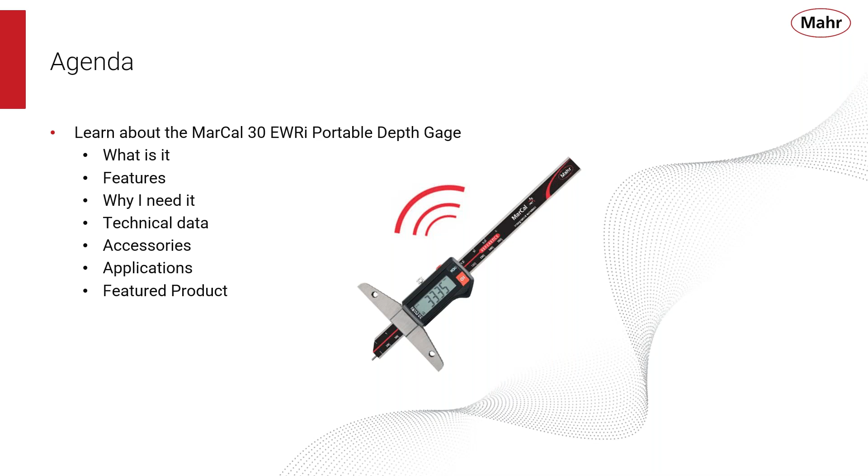Mahr has a wide variety and a full portfolio of digital and wireless hand tools, whether it be digital calipers, depth gauges, digital indicators, or digital micrometers. They're all feature-packed and modern, all high quality, and meant to be used out on the shop floor.

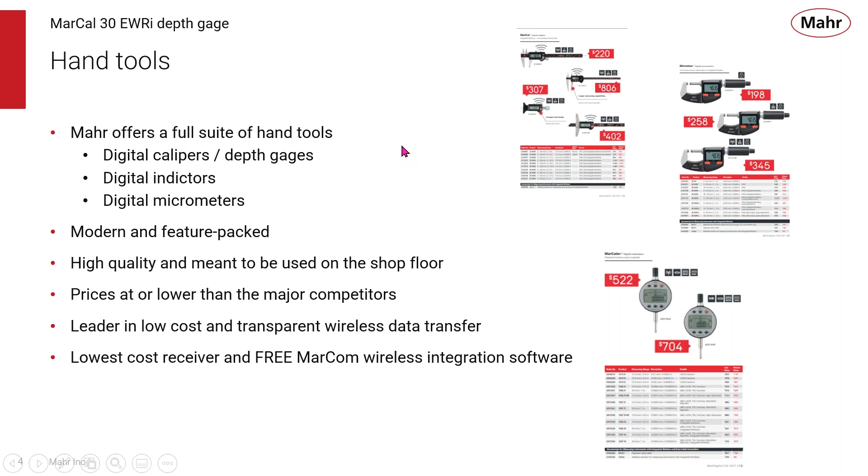And they are at prices lower than many of our competitors. We're the leader, I think, in low cost and transparent data collection. Plus, we have the lowest cost receiver, and free MarCom wireless integrated software, which all make our wireless products, I think, some of the best value out there.

This complete line of hand tools includes 185 innovative products, and 68 of them are integrated wireless, whether it be digital calipers, digital depth gauges, digital indicators, or digital micrometers. You can see we have a wide variety of not only standard product, but also specialty calipers and specialty micrometers for those unique measuring applications.

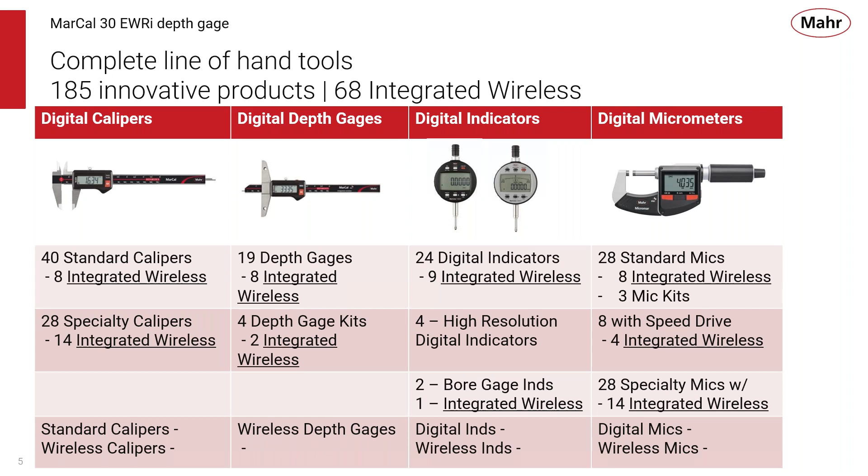Now here's our full line of MarCal depth gauges. You can see I have a broad product here of handheld gauges for lots of different applications. Starting with our featured product, the 30 EWRi, and its wired brother, which has the integrated wireless as part of it. It comes in a 6, 12, or 20-inch version.

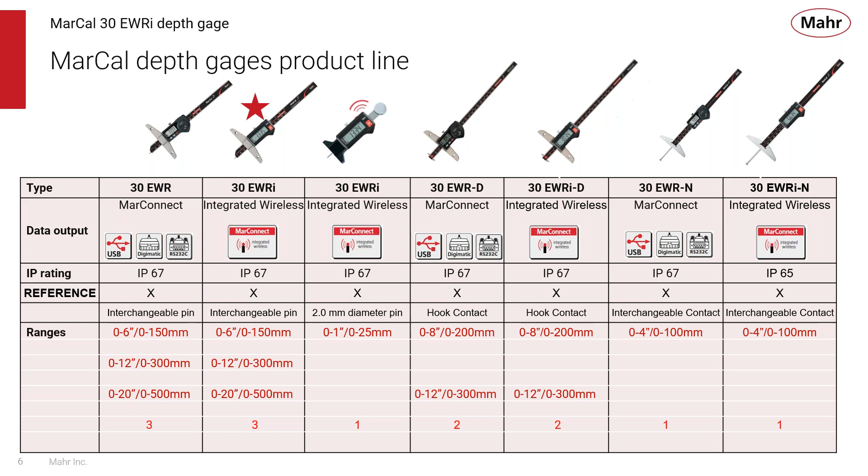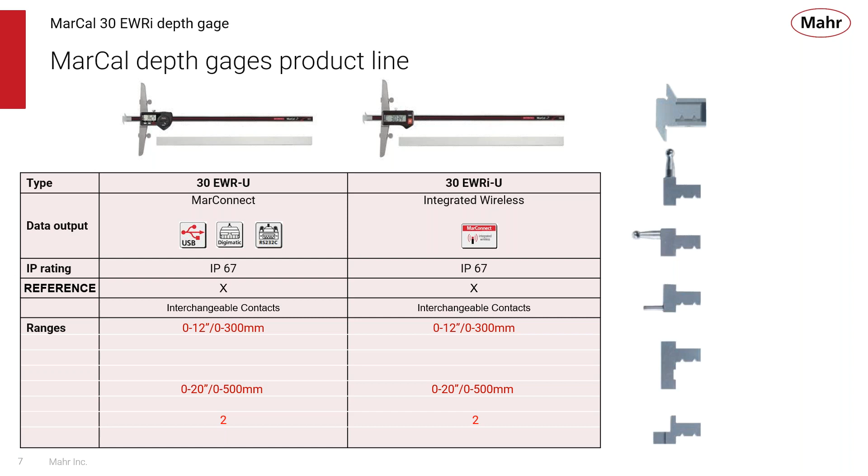We have a mini 30 EWRi that's pocket size and portable, plus other versions of depth gauges with different types of contacts or hooks on them that allow you to get and measure grooves and so forth within your part. Plus, we have a depth gauge with interchangeable contacts that allows for ball contacts, hook contacts, or edge contacts in a wired or wireless version, all the way up to 20 inches in depth, making these great universal depth gauges for virtually any depth application you may have.

Now, the MarCal 30 EWRi has lots of depth applications. They come with different contacts available. Most of them are purely for depth gauges, like the 30 EWR with its pointed contact. You can get a small or large bridge on it.

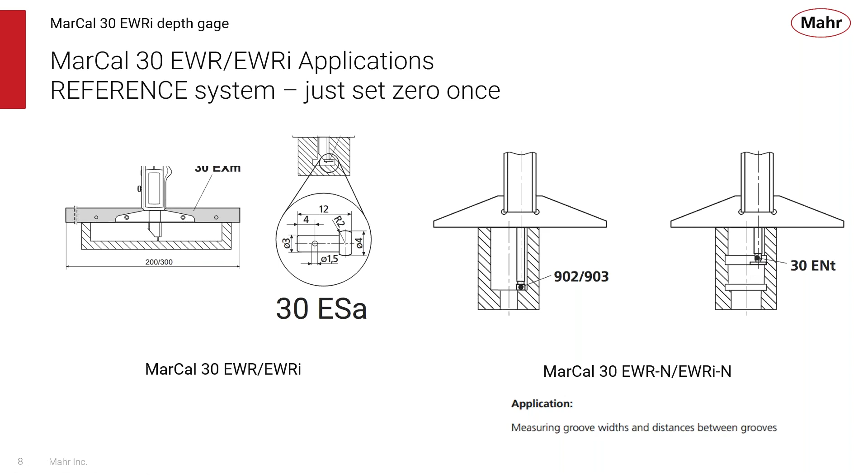But there are other applications where we can interchange contact points, allowing us to get into various above or below grooves within the part we're measuring. Some of our depth gauges have hooks on them, so if you need to get an inside shoulder on a depth or an upper shoulder, or the length of that groove, these types of depth gauges are ideal for those applications.

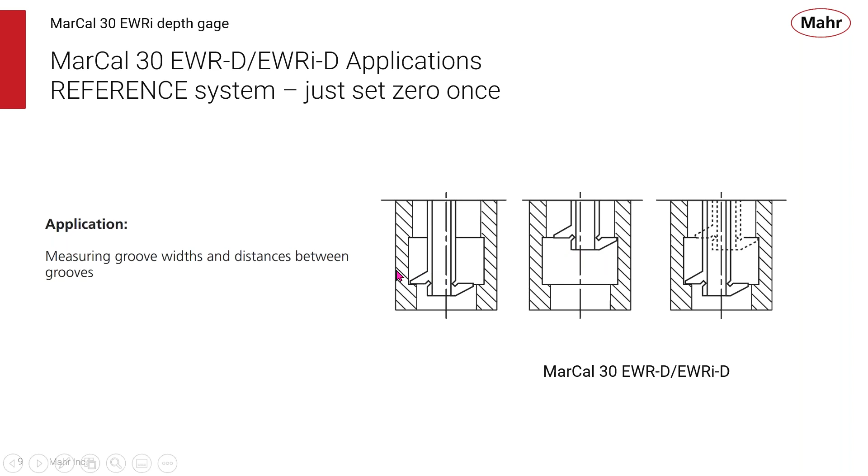With our depth gauge with interchangeable contacts, we have the hooks, extended ball contacts, we can get into a small drilled hole within a depth, close to an edge if needed, and these contacts are all interchangeable and can be used for lots of different depth applications. There's even a large measuring bridge up to 300 millimeters that allows you to span large diameters or large grooves and still use the depth gauge with great accuracy and performance.

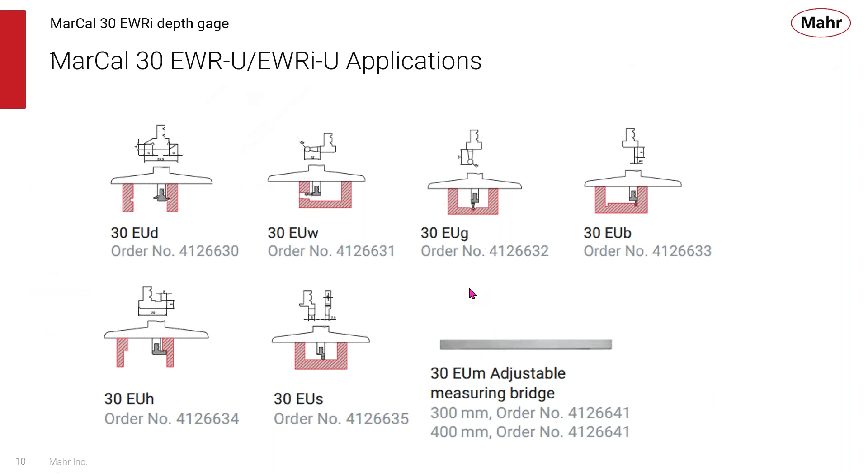Now specifically, let's talk about the 30 EWRi. This is the depth gauge with integrated wireless. It's IP67, it has the reference, and it has an interchangeable pin which can be removed, and other versions or contacts put in its place. This comes in capacities up to 20 inches. The one for this promotion is our 0 to 6 inch, our most common 30 EWRi.

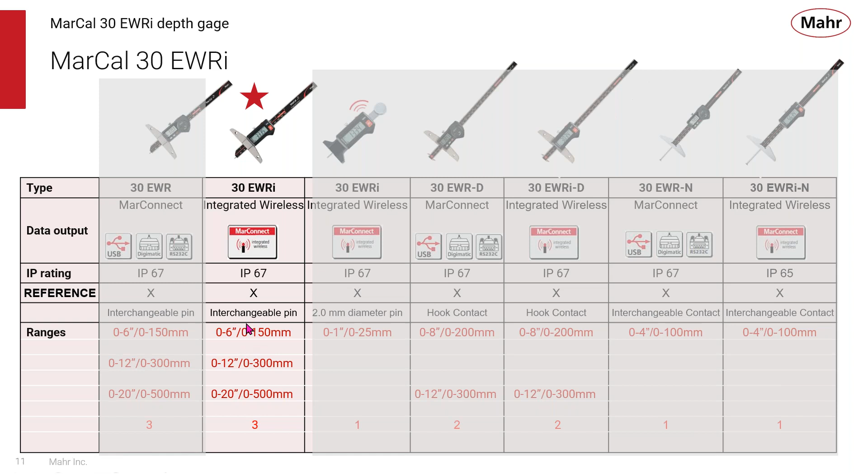Now let's take a quick look at some of the features of the MarCal 30 EWRi. We have the high contrast digital display with a digit size of 11 millimeters. Our small contact is 2 millimeters in diameter, but this can be replaced. It's simply a pin, and it can be made longer if needed, or bent, or specialty pins can be created and used. We have a locking screw that locks the slide into position.

There's a lock function, a key lock, which prevents the user from accidentally pressing zero and re-zeroing the gauge by accident. Of course, the 30 EWRi has the integrated wireless data interface, so that it's built in and transparent to the user.

We have a very easy to use and intuitive handling of the setup functions with a simple to use menu guidance with arrows that guide the user through the various functions.

The depth gauge is IP67 rated, meaning it's impervious to various liquids and dust. All our calipers have the reference system built in, so they can be turned on either by moving the slide or pressing the on key, and they always remember where the last reference or zero point was made.

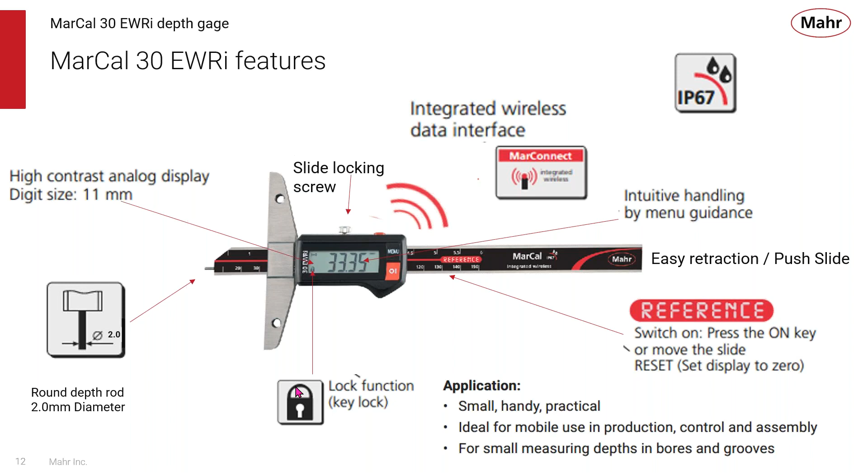We'll talk about some of the specific features of the reference system. It's probably the most important one. The reference system always maintains at zero, and it's always sampling the slide at a slow rate.

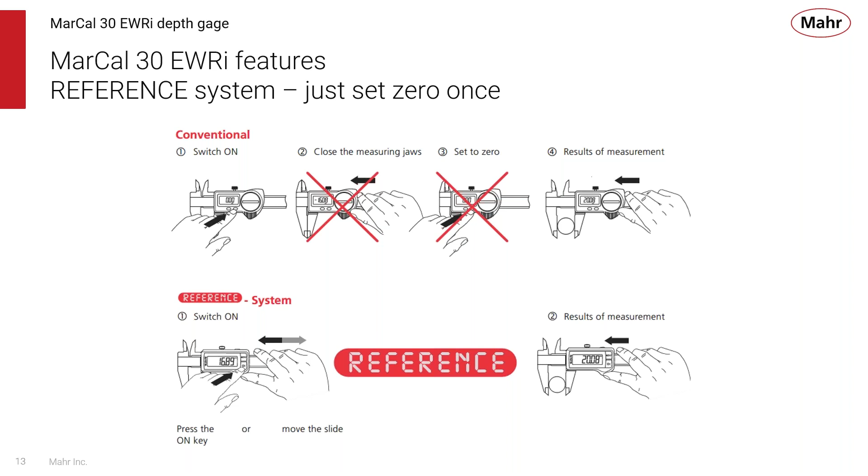So if you move the slide, it'll turn the caliper or depth gauge on, and it remembers that last zero point you made. There's no need to set zero every time you use it. If you set it once, you can forget it, and it's going to be there.

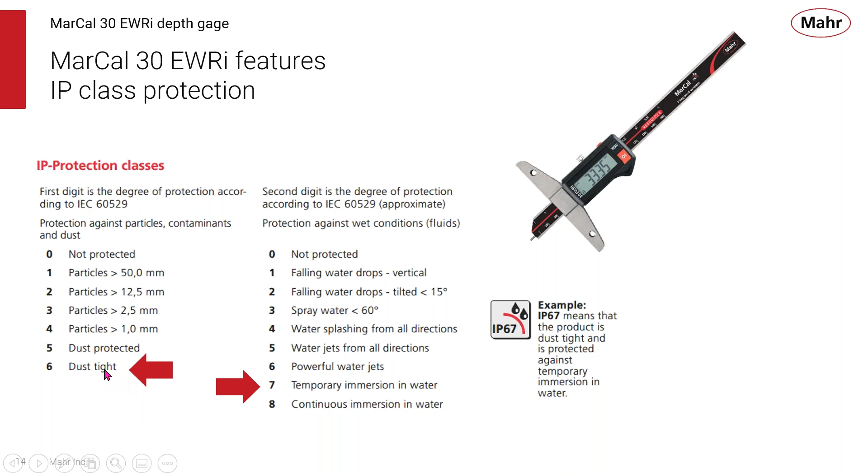It's IP class 67, which means it's dust tight and protected against temporary immersion in water. So if you drop it into a bucket of coolant, you can wipe it off and still be ready to use it. It's impervious to those types of accidents, so it's ideal for use at the point of manufacture or in a quality control inspection area.

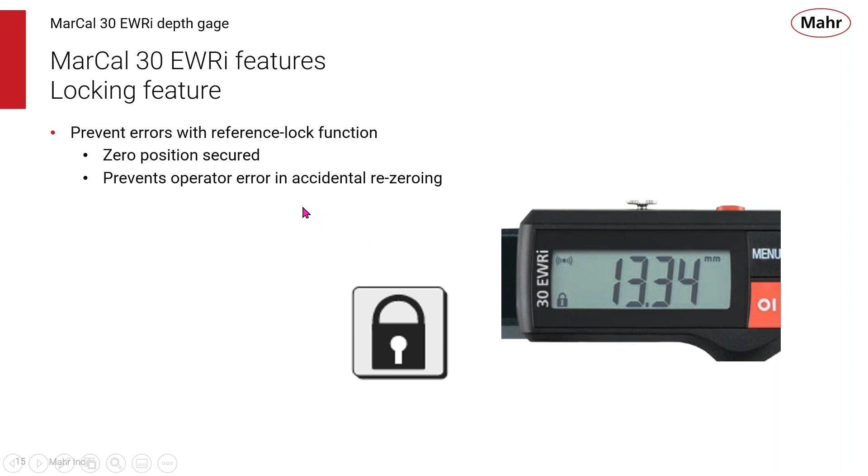It has nice large displays, easy to read, and the locking feature lets you know that the zero button and whatever other buttons you determine are locked out from accidental use, preventing the operator from accidentally re-zeroing the unit.

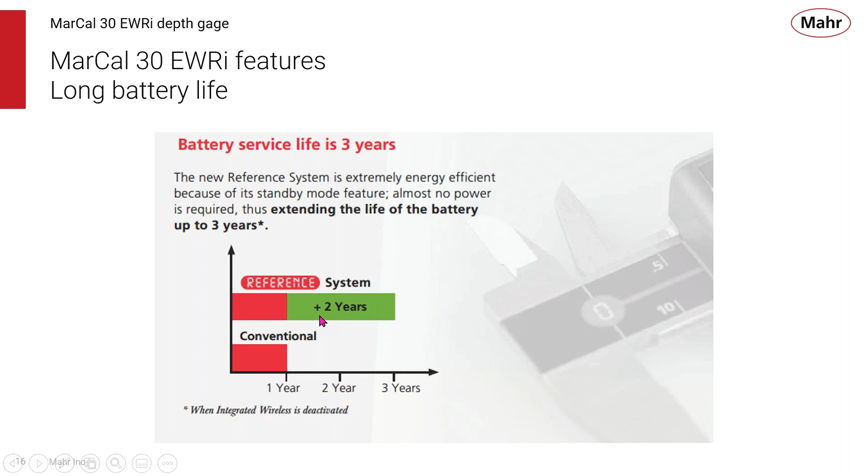All MarCal calipers and digital products have extremely long battery life. Typical battery service is up to 3 years. Of course, if you use it in wireless mode all the time, that's going to be reduced slightly, but typically 2 more years than a typical depth gauge.

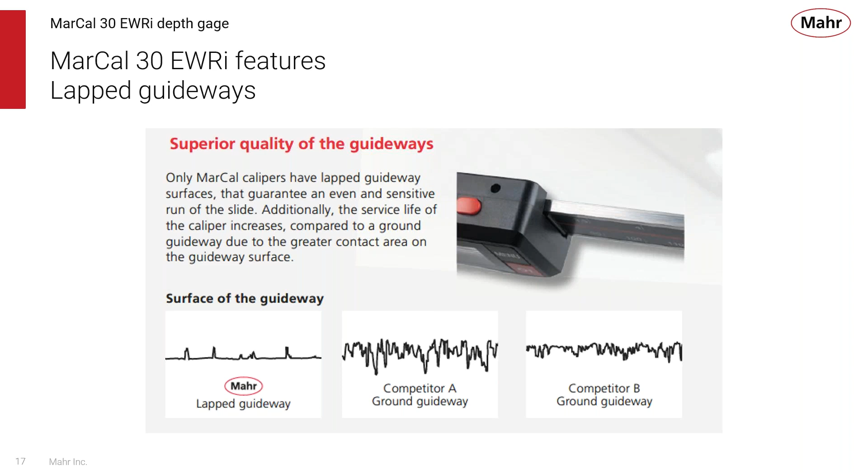With all Mahr products, we build the accuracy and performance into them, so all the guideways are lapped and very smooth. It's one of those products where you can pick it up and feel the built-in performance, how well the slide moves. It's just a great feeling product, even when it's in use.

We have the MarConnect integrated wireless, where the wireless transmission is basically an add-on of what a cable might be for another digital indicator. By eliminating the cable, it makes it a very easy to use and comfortable product for data acquisition, all done through our secure data transmission features with the integrated wireless.

We have a unique type of data transmission which not only signals when the data is received, but when the caliper or depth gauge is paired up with MarCal, it locks into a unique data code that has to be seen and recognized by MarCal for data transmission. So there's no chance of cross-talking or losing the data transmission because it's a secure transfer method.

It's a very comfortable product to feel and use. When you're using it, it feels nice and smooth when it slides, but the size of it with its large display and the way it fits into your hand makes it a very easy to use and trouble-free handling, so you get more reliable measuring results.

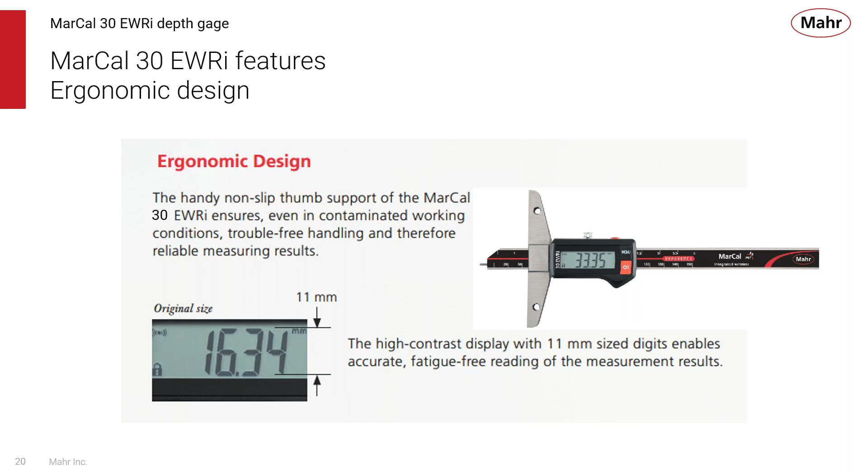So what types of measurements can we make with the 30 EWRi? You have your typical depth measurement where you're using the top reference for your surface and measuring the depth of that dimension going down.

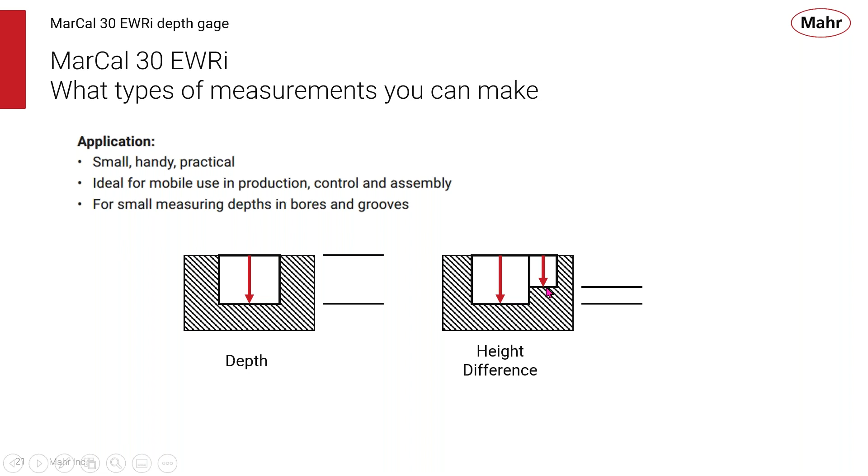Or you can use it to get the difference or height differences between two depths by zeroing on one location and then moving to the second, so you have that difference type of measurement.

Now, how do you use a 30 EWRi? Let's take a look at some of the typical ways that we want to use the caliper or the depth gauge. First of all, you set up the depth gauge for the proper inch or metric capabilities, and anything else you might want to set through our simple menu function.

It's very easy to follow, very easy to get into, and very easy to change the units. Once we have the units set, we're going to start getting ready to make our measurements. We want to make sure that we clean the workpiece off, and we take a look at the gauge itself, clean the guideways, clean the reference anvil and the contact point. Every measurement that we make is a process.

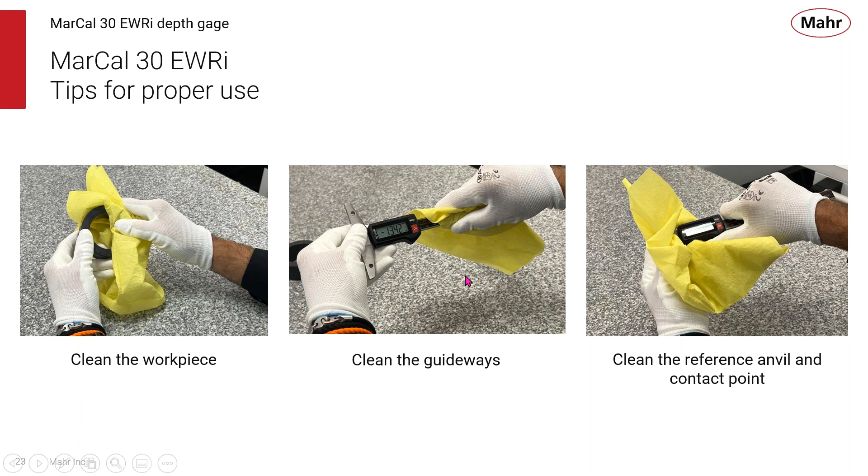It will make sure that the instrument and the parts being measured are clean and in proper condition to make a reliable measurement. Then we're going to select a good flat surface to set the reference for the 30 EWRi. A surface plate or a large gauge block will help in setting up the depth gauge. I want to make sure when we put the depth gauge on its surface, it's really square. You don't want any little angle or offset in the depth gauge itself. Once it's square, we push the sensitive contact down until it locks in onto the surface, and once the gauge is square and locked in, we press the zero button to zero out the depth gauge.

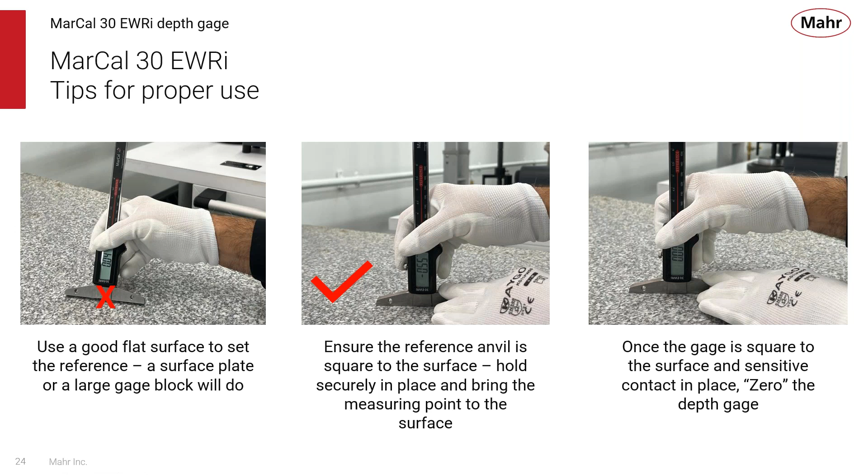Now we're going to follow the same type of procedure when we go to make our measurement on the part. We're going to put the bridge across the surface as the reference area, making sure that it's not tilted or at an angle. We make sure that it's secure and in place, and then we bring the measuring point into contact at the surface. Once you have contact there, you can pull it out, or you can use the hold function and then read the depth of the part that we're measuring. So it's very easy to use, but it's very important to ensure that we have a clean part and our measuring technique is proper for the dimension we're measuring.

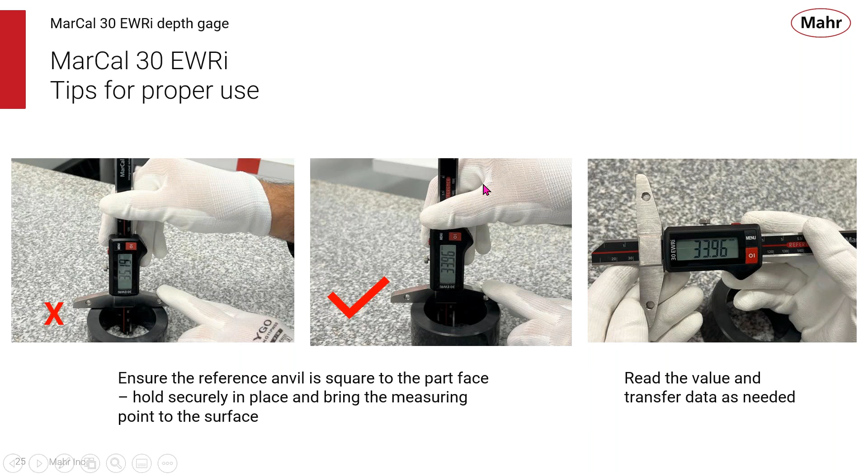So we have this great product to measure depth, but it does have integrated wireless built into it. Data collection is becoming a growing area for part documentation, process control, process improvement, and gauge tracking. The nice thing about integrated wireless is that the data transmission is transparent to the operator. There's no add-on modules. The gauge is really part of the measuring routine, as is the data collection. There's a single battery, and there's no add-on modules that have two batteries within the operation. So really, it becomes a very cost-competitive way of doing data collection.

Now, with Mahr's data integrated products, you just need three items: the product itself, our wireless receiver, the iStick, and free MarCom software. This gets you into collecting data or transferring the data to a third-party measuring system.

So wireless devices are great because they offer a lot of convenience. In the past, we had many products doing data collection, and each one had its own cable. If you were doing multiple inputs, there were multiplexers and so forth to get all that data connected, and it became a very cluttered and possibly messy way of collecting data. But with integrated wireless, we have no cable clutter, a single battery to work with, no expensive add-on modules, no expensive receiver. So the data collection is easy, it's clean, and it's transparent to the user, all with MarConnect and our integrated wireless system.

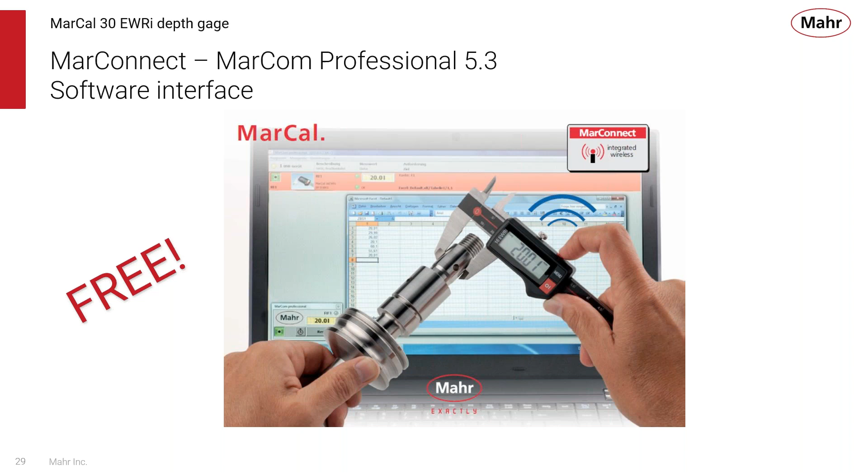Now, MarConnect is available with MarCom Professional Software 5.3. It's free. It can be loaded off of the Mahr.com website. It's a very powerful tool for collecting data. It allows you to take wired product, wireless products, or add-on modules and bring that data into a number of different tools, whether it be Excel or a Microsoft-based program, through a Q-DAS program, we can send data to third-party software. We have an electronic or soft mux box which can transfer data into third-party software. So this provides a very easy way for getting data from our hand tools to your data collection system.

We keep improving the performance of MarCom and the hand tools, making them more powerful as part of the data collection process. One of the ways of doing that is to have an identification number of the gauge come out with the data that's being transferred, so we can send out a serial number with the data.

This allows for recording not only the data, but also the time it was collected and what gauge it was. When you know what gauge it was, you know that gauge is under control. It has calibration routines behind it, so now you can really document the whole measuring process.

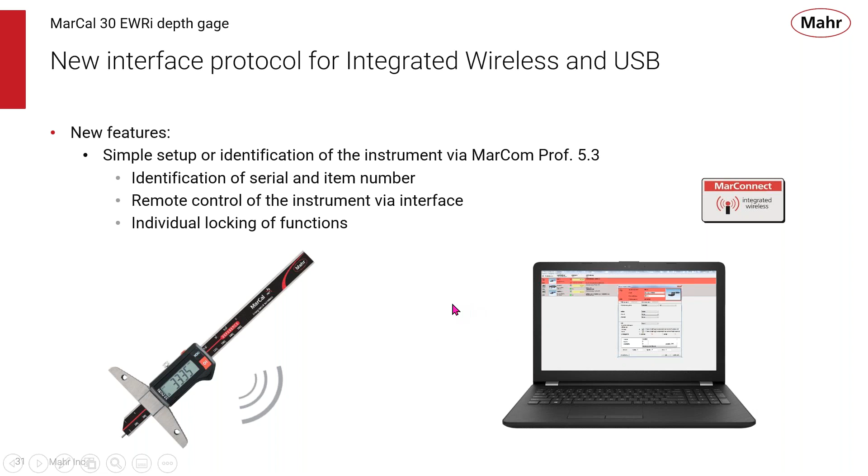MarCom also allows us to remotely control the instrument, so we can send in tolerances to the product if it has them. We can lock out various features to prevent the operator from accidentally pressing the zero button, for example. All those features are standard with MarCom.

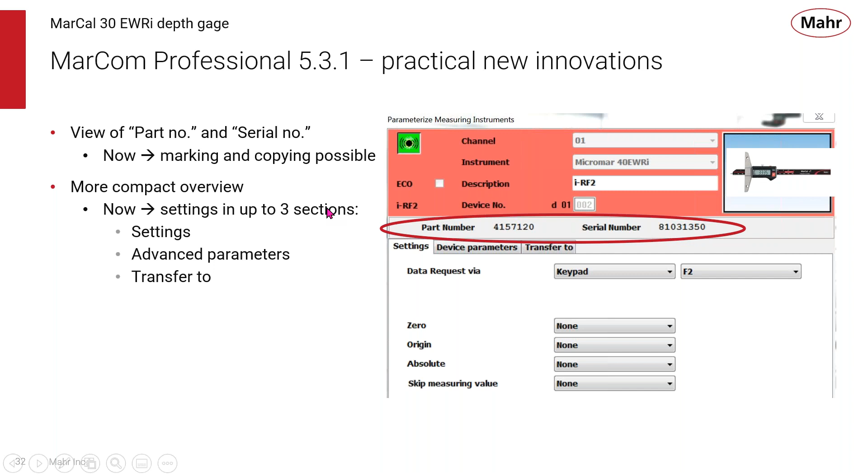During the MarCom setup, you have the ability to put in a part number and a serial number for that gauge. All this becomes part of the way to link together that complete inspection process, knowing the gauge and knowing the serial number. It's all collected, and it's a very good way of documenting the valid calibration of that instrument.

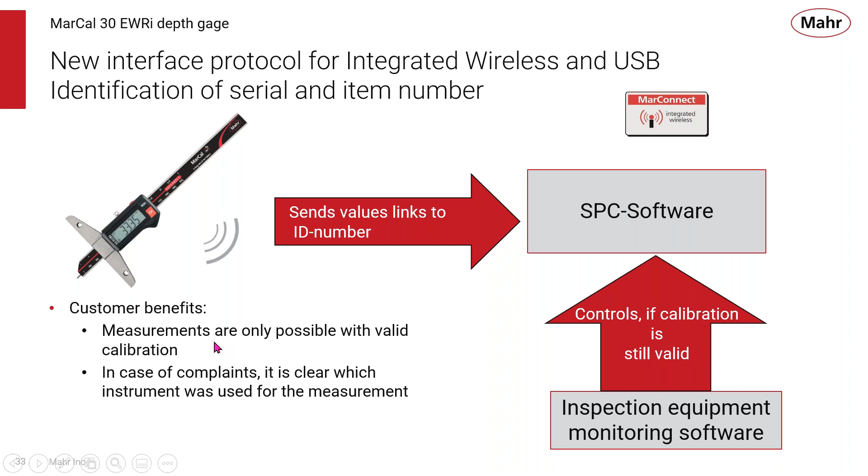Plus we have two-way communications, so you can use MarCom. There are windows on here to set up the device parameters, and you can lock the various parts of the depth gauge. All those features are part of MarCom.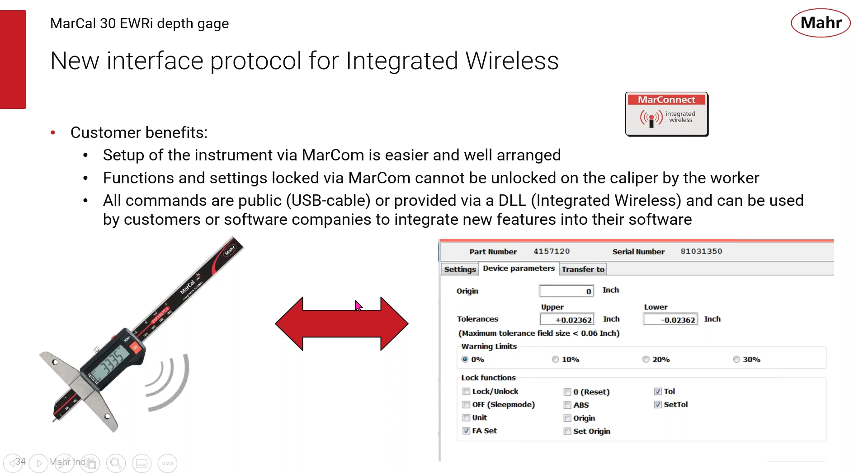You can set up what data transfer is to be sent to the Excel tables - the description, the serial number, the part number, the date and time, along with the measured value, are all part of that data stream that comes out of the product.

Every now and then an accidental data transfer can be sent. We now have the feature to reset the last data transfer in Excel, so if we've made a mistake, we can remove that last piece of information from the data collection process.

So we've talked about a lot of things about the MarCal 30 EWRi today - its features, accessories, how to use it, and why wireless data collection is really the way of the future for collecting data, because it's easy to use. With the capabilities of the 30 EWRi, it's really the choice for depth gauges that can be used at the point of manufacture.

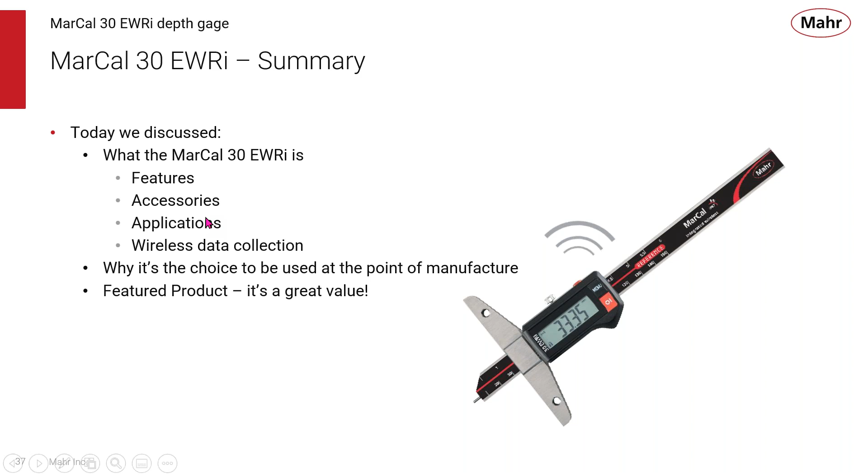This is our featured product, and it's a very great value.